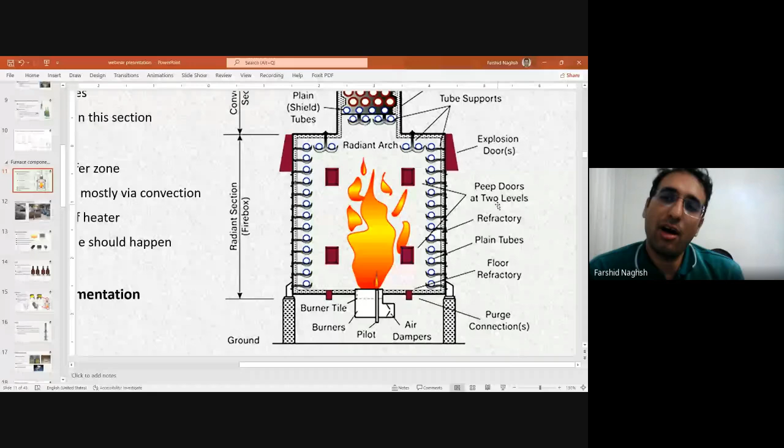Also up above, you see explosion doors. Explosion doors are required to keep the heater safe from a structural point of view, to keep the structural integrity of the heater when you have an explosion inside it. These explosion doors help the wave of explosion get out of the heater instead of directing it to the convection section. So they are necessary to be planted on the heater, and they are vendor catalog items, and they have some calculations. The explosion doors are bought from explosion door vendors, and if I remember correctly, for different duties, a minimum number is required, with minimum changes for different duty ranges as per API 560 to be placed on the heater. So these explosion doors help the safe operation of a heater.

My experience is that explosion doors are very hard to place on smaller heaters, because you have a lot of connections on the heaters around the upper portion of the radiant section, and also the size of the explosion doors are not finalized when you are in clarification with the vendor. So it takes a lot of space, and this causes the other instrument and process nozzles to go inside together and be very close to each other. All in all, explosion doors are required as per API 560 and help the safe operation of the heater.

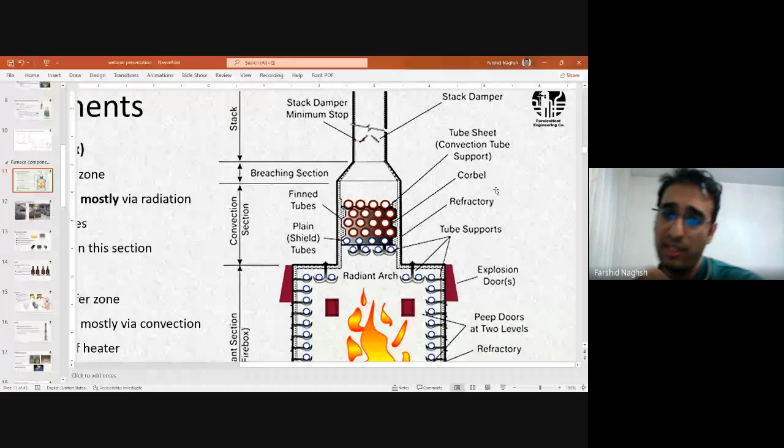In different sections, different sorts of supports are prepared for tubes. For example, in the convection section, based on the geometry of the tubes - in this heater, we have horizontal tubes which are perpendicular to the plane of your computer screen - you see we have two types of supports.

The above one looks like a spoon. For supporting the tubes which are on the wall, we need a spoon type of support, and for the tubes which are going slightly below the roof, you need this kind of hanger support.

These supports are not covered with refractory, so they need to have a high alloy metallurgy to be able to resist the high temperature. Most of them are manufactured using a casting process, and the metallurgy is selected based on the tables available in API 560. They are also high alloy metals, for example chrome nickel alloys, 50 chrome nickel alloys, and they are manufactured normally using casting technology. I will go through them a bit more on the next slides.

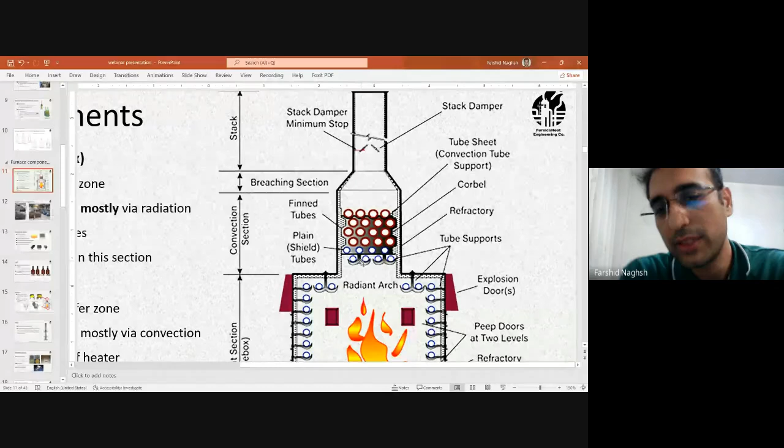Now let's talk about the tubes here. The tubes that are here directly see the flame, and we have requirements based on API. You see in this picture we have blue tubes here, and again blue tubes here. They are plain tubes, and these plain tubes should be used here as per API.

It means you have to have the same metallurgy for the tubes that are in the convection section but see the flame directly. How many rows of tubes? As per API 560, you need a minimum of 3 rows of shield tubes. They are called shield tubes or shock tubes.

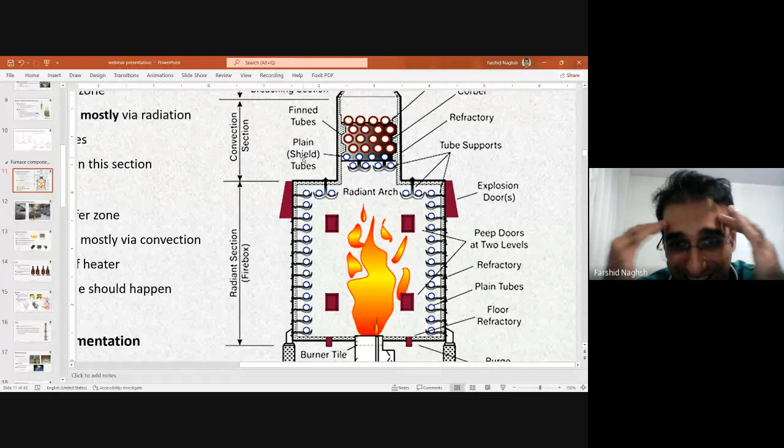Why are they called shield tubes or shock tubes? They are called so because they shield the upper tubes, which are fin tubes, from flame. In older designs, for example in 1960 or 1970, the designers used to put a refractory wall here to protect these tubes.

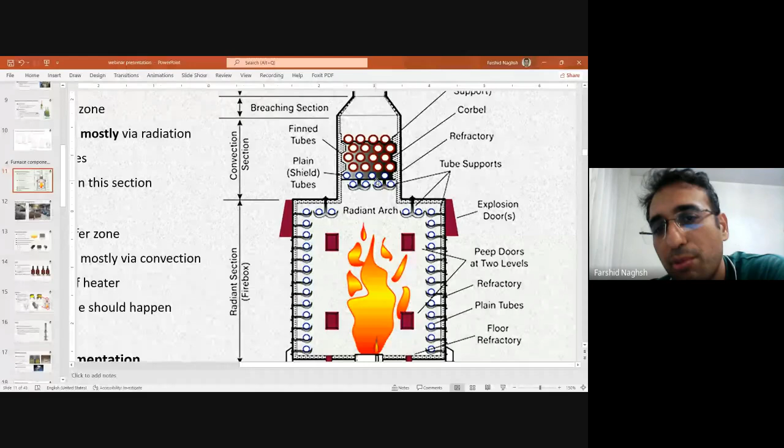The criteria, the philosophy, has changed with the advancement of metals and materials, and there is no need to put a refractory wall here. We use a higher, more resistant metallurgy for the tubes, minimum of 3 rows, and we call them shield tubes. These shield tubes protect the fin tubes from the high radiation of the flames.

And the interesting part is that you have a design theory for the tubes inside the radiant section. You also have the same design theory for these shield tubes, although they are in the convection section, and they are viewed as radiant tubes in calculations, although placed in the convection section.

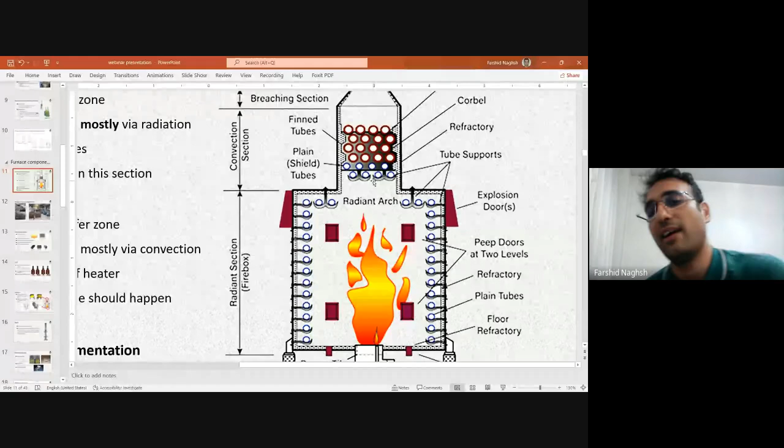Okay, we have shield tubes. As per API, we have to have a minimum of three rows of shield tubes with the same metallurgy as radiant tubes. Some of my colleagues sometimes tell me that we change the metallurgy, using lower metallurgy because they are installed higher above the flames. But as per API this is not allowed, and you have to have the same design criteria for the shield tubes and radiant tubes.

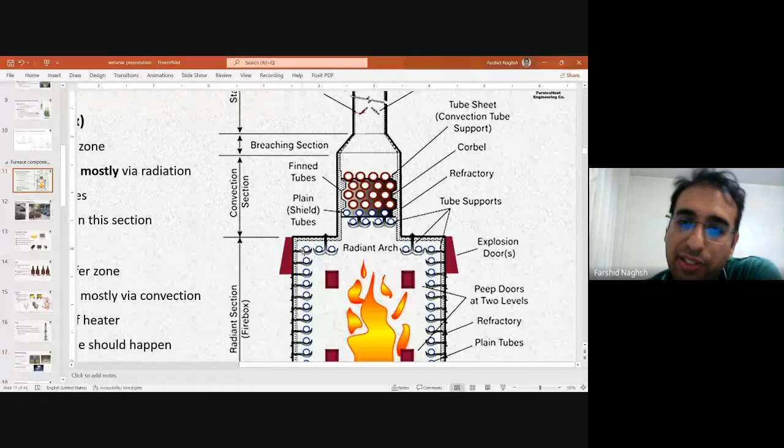Above the shield tubes, we have convection section fin tubes. I said minimum of 3 rows of shield tubes. There can be more shield tubes, and also after that we can have either fin tubes or we can again place bare tubes.

There is no limitation for us to use fin tubes or bare tubes, but it is logical to increase heat transfer by using fin tubes here. So we normally have fin tubes here, and keep in mind that the flue gas passing through the convection section, going from down to above toward the stack, reduces its temperature and loses energy.

So the tubes experience lower temperatures as you go higher up. If you have more sections of convection, more bundles of tubes, you can use lower metallurgy tubes because they are going to experience lower temperatures. It's not shown here, it is only one bundle of fin tubes.

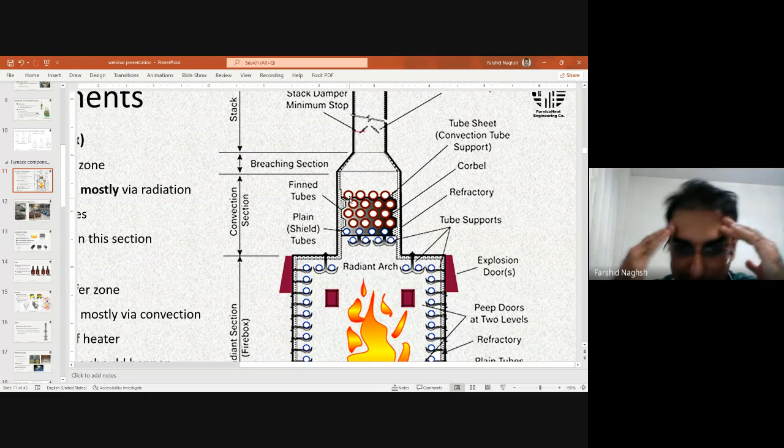It is normally forged or cast, manufactured of forged or cast material. It is manufactured of high metallurgy, high alloy metallurgy, and it has many mechanical problems.

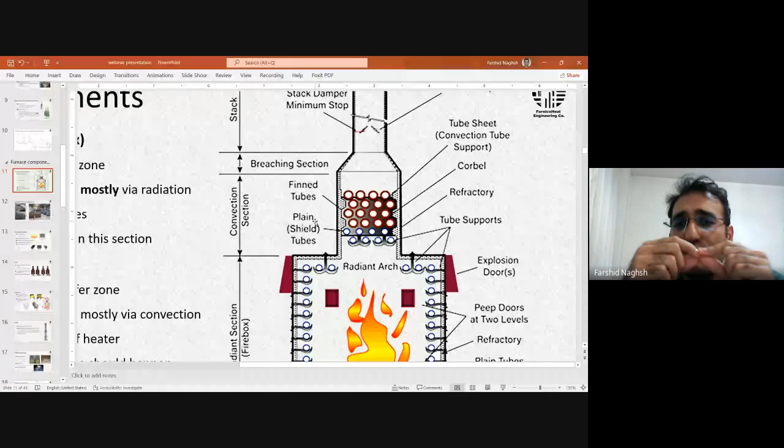The dominant failure mechanism is creep inside these tube sheets, and they have to be carefully designed and manufactured. We buy most of them from China, and they are very big and thick tube sheets, with tight tolerances. One big difference between these tube sheets and shell and tube tube sheets is that, because of the high temperature, the tubes are allowed to move freely inside the tube sheet and are not welded to it. They act as a weight support to keep the weight of the tube and process fluid, especially important at high temperatures where these movements matter a lot.

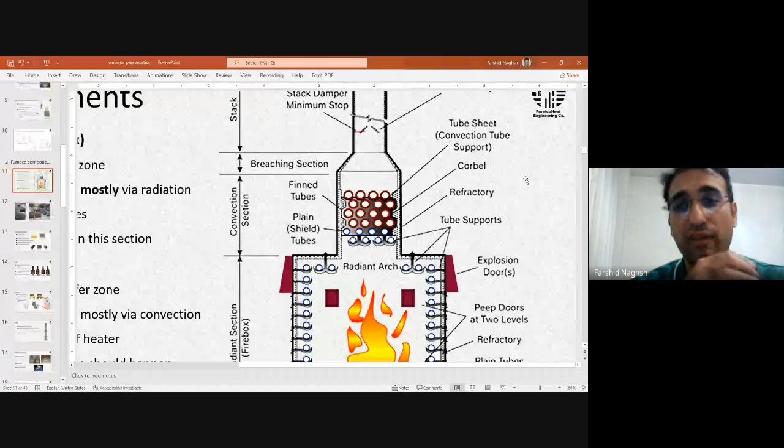Okay, so this was everything about the convection section. We'll talk more about tube sheets.

Okay, we need a breaching section. We need to change the geometry from a rectangular shape to a circular shape, so we need a breaching section. This breaching section sometimes makes a lot of operational problems for us. If I had time, I would go through the problems associated with it. After that, we have the stack, which helps the flue gas get out of the furnace, and we have a damper to control the pressure or draft inside the heater. We'll talk more about the pressure profile inside the heater later.

Okay. Very, very hard slide it was, and it has a lot of points to talk about. Okay.

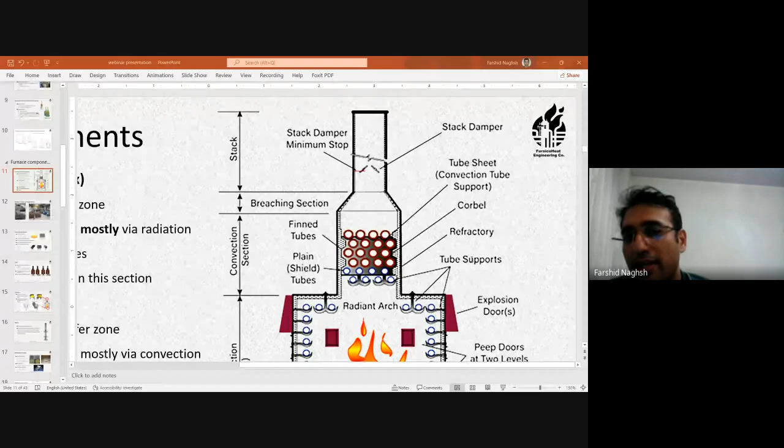Thank you, Mr. Akbari. Mr. Jafari, refractory means a layer inside the furnace - yes, we'll talk about refractory in the following slides. Yes, it is a layer of material, mostly alumina based, to keep the heat inside the furnace. Yeah, that's right, thank you very much.

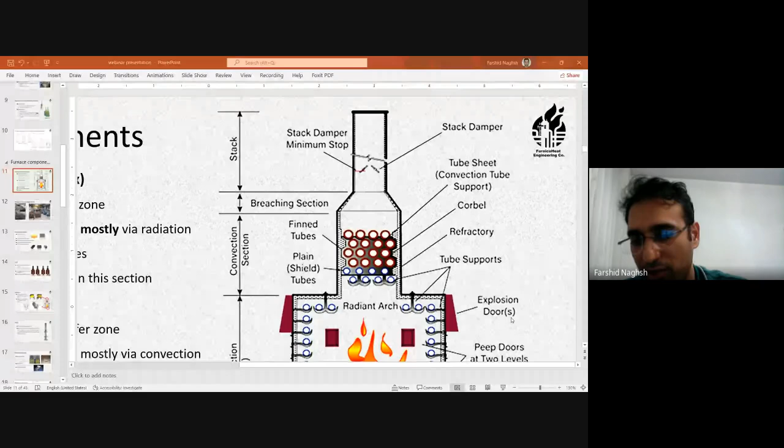API 936 describes inspection and installation, and the method to buy the monolithic refractories, and is a very good help. Yes, as per API 560, if you use castable for your furnace, you have to follow API 936. This is mandatory, so we need to use API 936. Yes, I'll talk about it in the following slides. Thank you, Mr. Akbari. Okay.

We talked about the configurations of the heater. We talked about different components. Now let's see real-world examples of the tube arrangement in the radiant section.

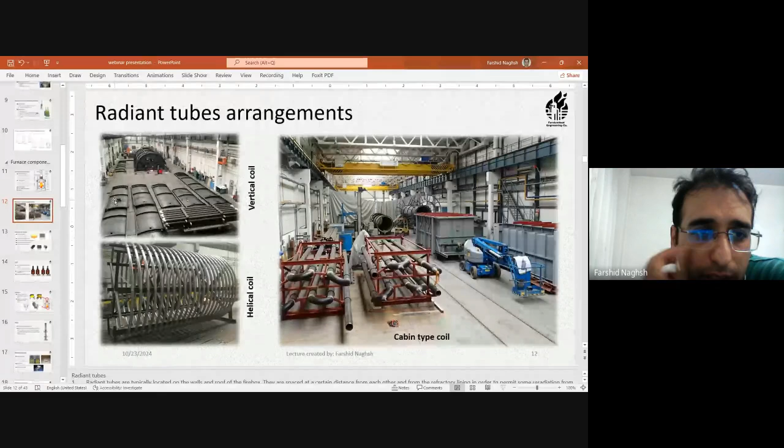And you see here the coils that would be assembled together, vertical. You see the coils here, and also these doors on the modules - they are the inspection doors, I guess. Anything else I see here?

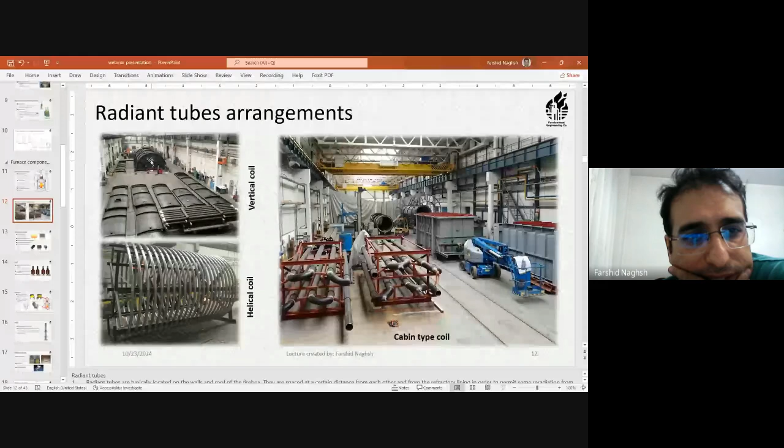You see the bottom, I think it's very small, but from a mechanical and structural point of view, you see that the body of the heater is stiffened using stiffeners. Also, I guess the bottom of the heater is also being stiffened by the stiffeners.

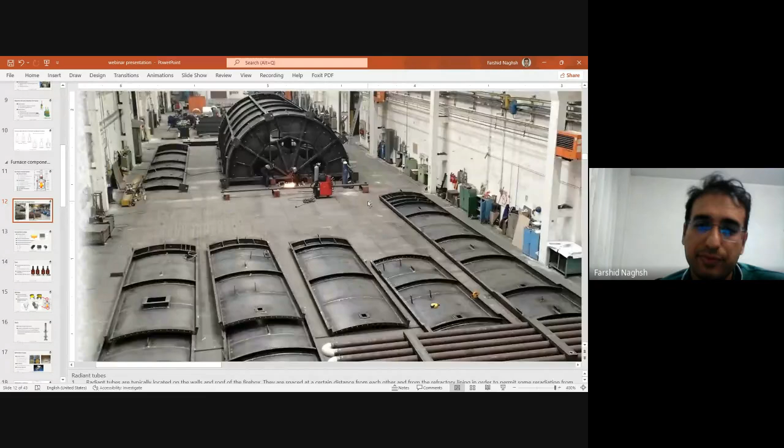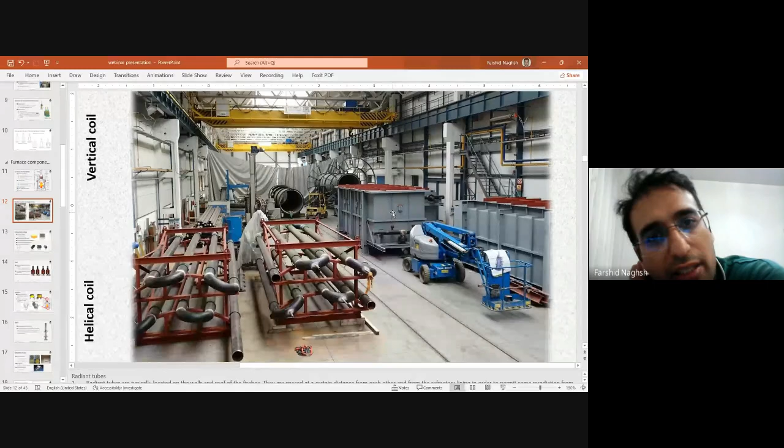Also, they were all cylindrical type. You can also see the box type heaters - see, these are the boxes, and these are the coils that will be installed inside the boxes.

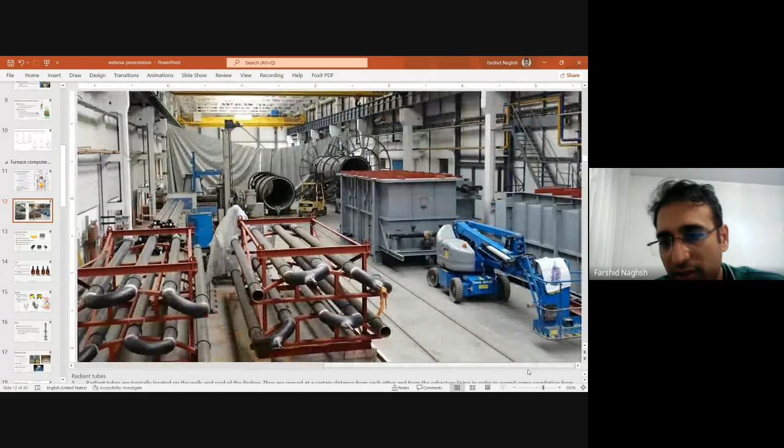I guess by the looks of it, they are fabricated as modular. They will be shipped to the client's site and installed on each other, before every section - first the coils are installed, then the other section comes on top.

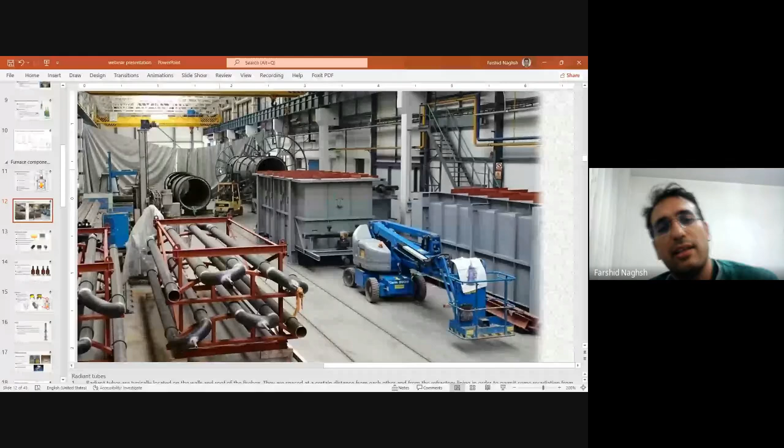Also, you can see a smaller vertical cylindrical - no, this is a stack, I guess. Probably the stack of the heaters. The platform here shows that it is a stack, not a radiant section. Okay.

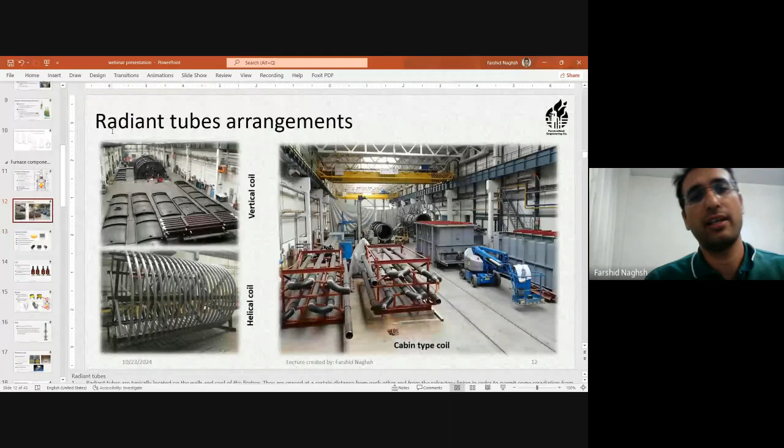Now that we have talked about radiant tubes arrangement, let's talk a little bit about convection tubes. I went through them mostly, but it's not a bad idea to review that. This is the convection section.

In simple heaters, configurations may change based on the radiant section, but the tubes in the convection section are always horizontal, because the economizer or convection section is installed on top of the radiant section. There is no other arrangement logically possible, so the tubes are horizontal. If you make the tubes vertical, some other things might happen.

The flue gas comes from below and exits from above, passing over the bare tubes and fin tubes. See that we have 3 rows of bare tubes, and the other tubes are fin tubes. We'll talk about the number of passes in later slides.

Tubes are installed horizontal and can be shared between multiple fireboxes. Yes, there are some licenses that employ, for example, 2 radiant sections that come and merge into one convection section.

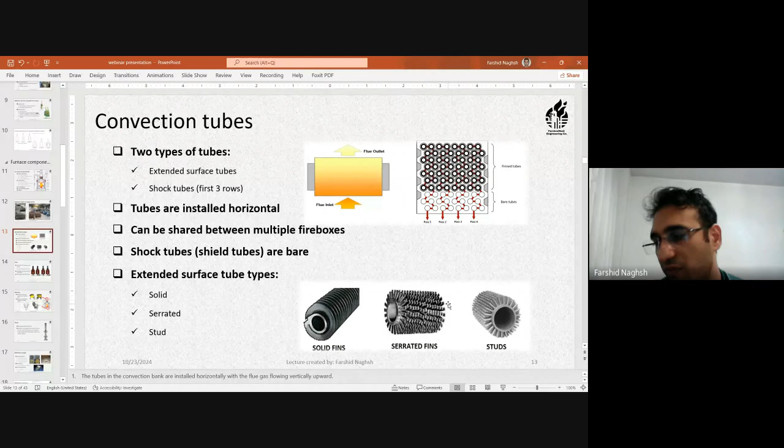So it depends on the process, it depends on the fuel, to choose what sort of fins you use. Obviously, the type of fin should be considered in the thermal design of the convection section.

We will talk more about the design of those sections in later slides, but for now I'll skip and go to other components of a fired heater package. A fired heater package, from a pressure point of view, from a draft point of view, can be divided into 2 major subsections: the first is natural draft heaters, and the second is mechanical draft heaters.

What are natural draft heaters? You see it as the first heater on the left. A natural draft heater is designed in a way that the flue gas itself, with the help of the temperature provided by the burner and the stack effect, can get out of the heater. It can transfer its heat to the surrounding tubes and get out of the heater.

The job of a heater designer, a thermal designer, is to make sure that in a natural draft heater, the flue gas in different scenarios of operation is able to get out of the heater. You may ask, is it possible that a hot flue gas would not exit the heater? Yes, it is possible. For example, see here, you have a convection section.

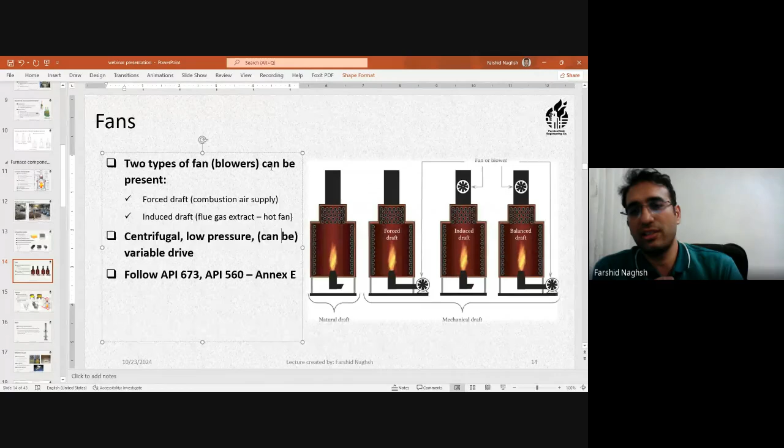Now, I forgot to talk about a very important word: draft. What does draft mean? As per API definitions, draft means negative pressure. So when I say I need a draft inside my heater, it means negative relative pressure in comparison to the atmospheric pressure. Draft means negative pressure.

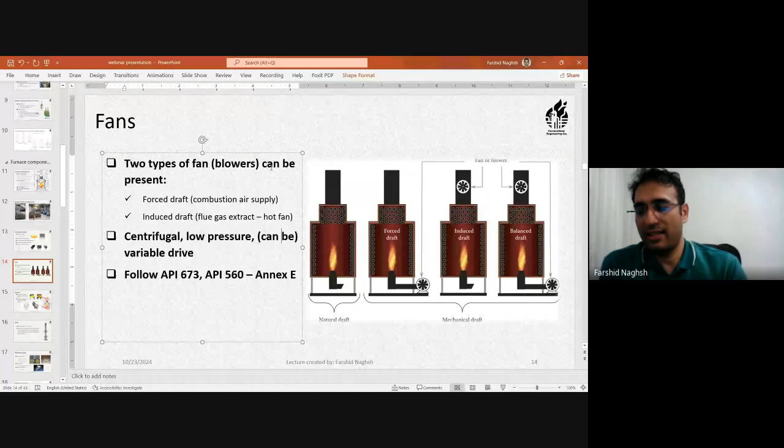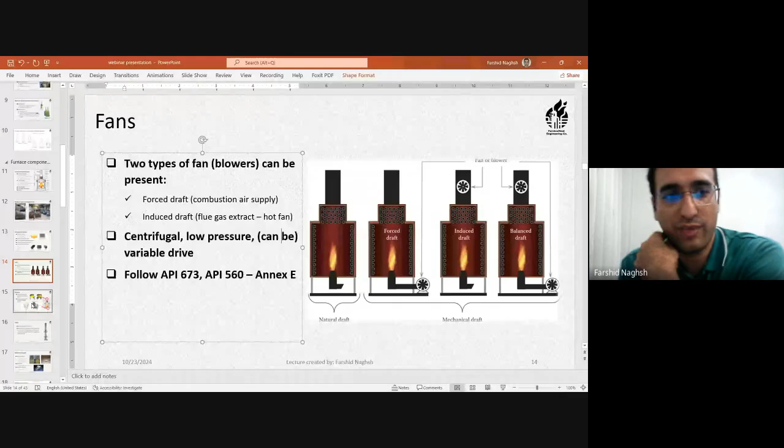An important point is that inside a heater, you are not allowed to have a positive pressure. A very well-designed heater cannot have positive pressure. Okay, let's move on, I think we are losing track of time. I have to be a little bit faster.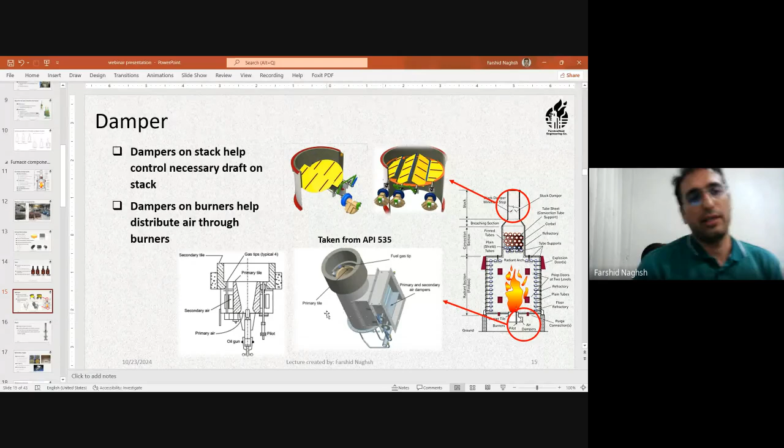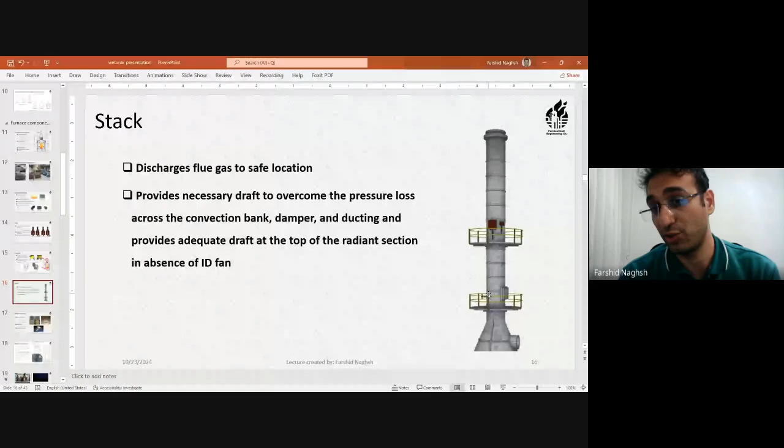The last part is the stack which we talked about. Take a look at these platforms. They are very important from a mechanical point of view and also an operational point of view. You need a platform to let the operator take samples of the flue gas inside the stack. There are some requirements inside API 560 and ASME STS1 for these platforms, the place they should be located, and the height at which they should be installed on the stack.

Now let's go to refractory. We have three major types of refractory as per API classification. API classifies refractory into three major categories. The first are refractories that have one shape: they are monolithic, further categorized as hydraulically bonded castables, chemically bonded castables, and chemically bonded plastics.

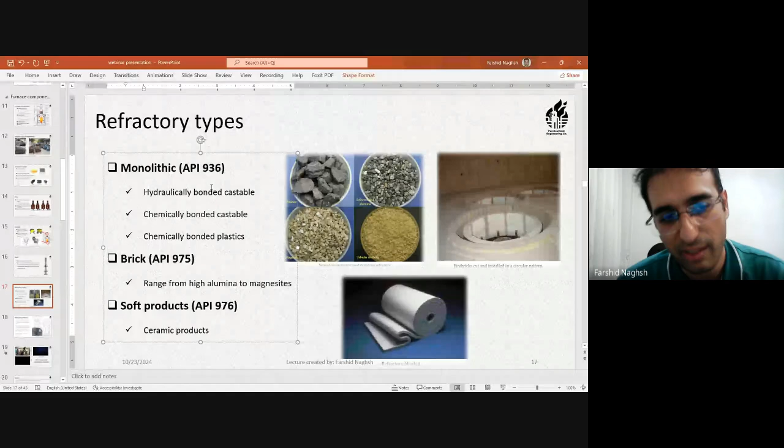You can read a lot about these three types in API 936. They are monolithic refractories; you can see the shapes here. They are sometimes mixed with water, or there are some methods to prepare and apply them. They are monolithic refractories, having one shape, and we will see some videos of them in following slides. Also, we have brick refractories as per API 975.

You have seen them in the bakery near your house probably. These are fire bricks, and they may have different compositions. I'm not going through the compositions that are required, but they are in form of brick. They are harder to install, but they are much more resistant to creep cracks inside the furnace.

Also we have soft products which are mainly based on ceramic products. You see one blanket here - this is a ceramic blanket that is used in certain places. For example, soft products are used in clean flue gases on the top layer of the refractory. Sometimes they are used when high temperature tube sheets in heat exchangers are needed.

So soft products are based on ceramics, and they have their own application and their regulations. API 560 has talked a lot about this - a big part of the API is about the usage and how to install these kinds of refractories.

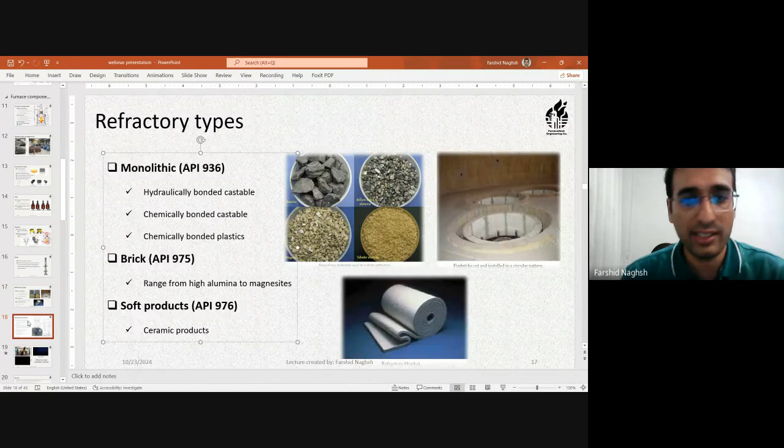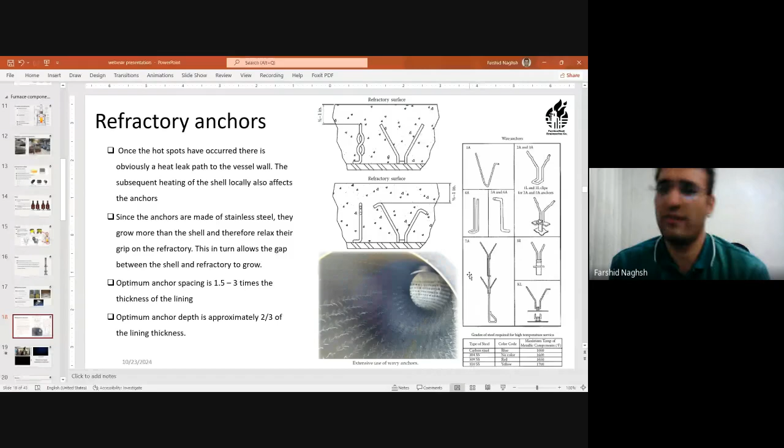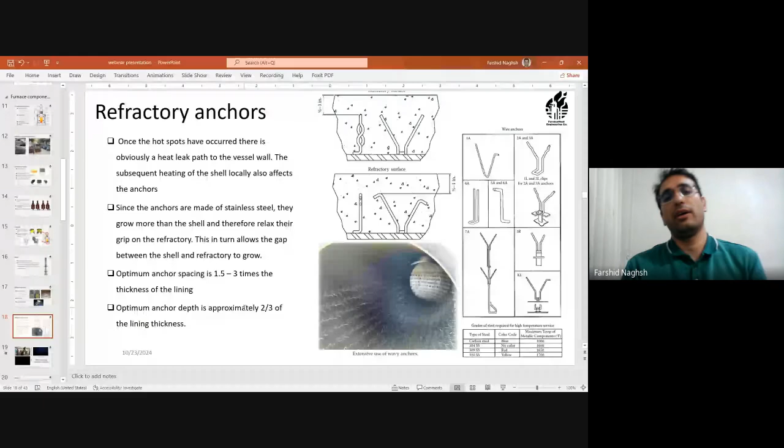These refractories need something to keep them and hold them in place. They are called refractory anchors. They have different shapes - this is wavy, this is V-type, and you have different types. Their material is mostly stainless steel. I have worked with Inconel anchors, and they keep them in place. The anchor spacing and the depth of the anchor requirements are very well told inside API 560.

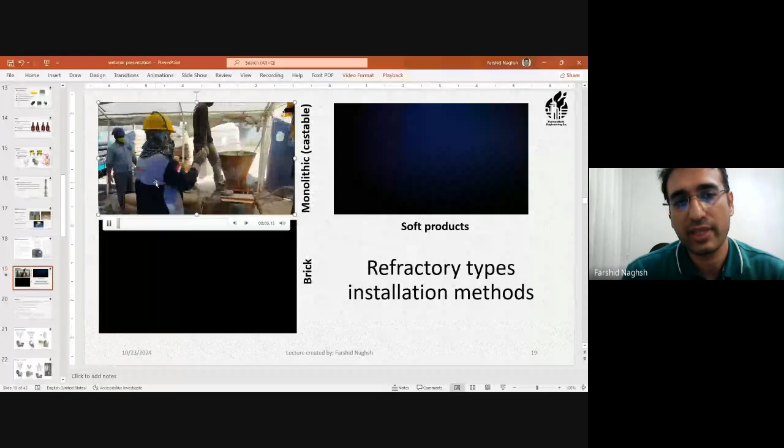Let's see these three mini movies on applying refractories. This is the gunning mechanism, a gunning method. This is like shotcrete for applying concrete in building structures or houses.

This is a castable. This is applied on the surface, the internal surface of a vessel, and you see safety is very important here. People have to wear masks and be careful about their safety. This is one method of using monolithic castable refractories.

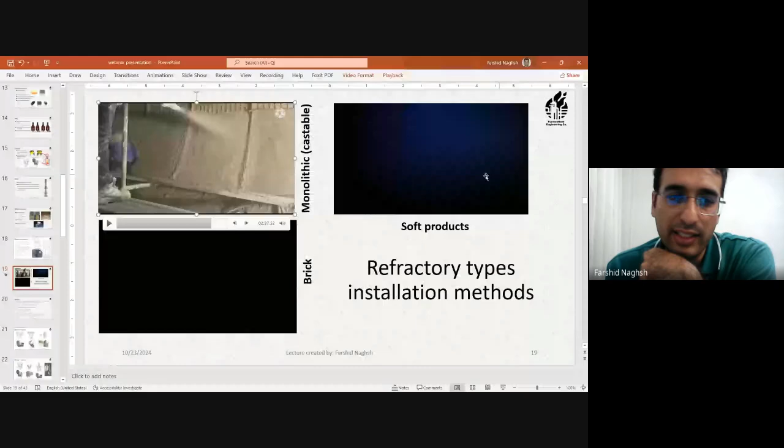The other one is, I think, inside the boiler. Yes, this is a boiler - the folks are applying fire brick refractories using mortars. This is another kind of refractory, and it has its own limitations.

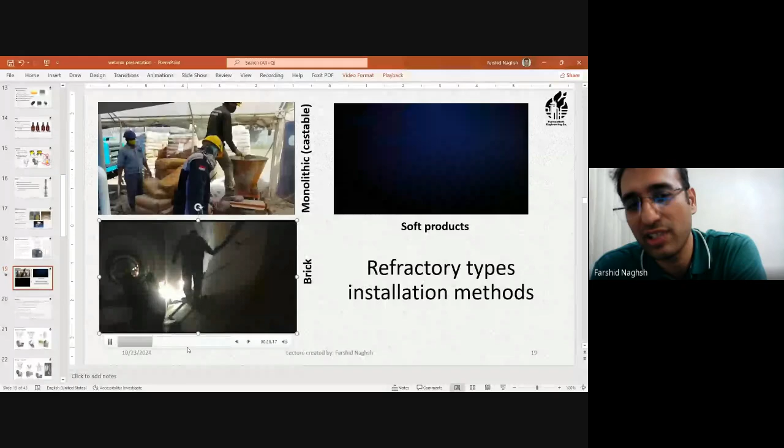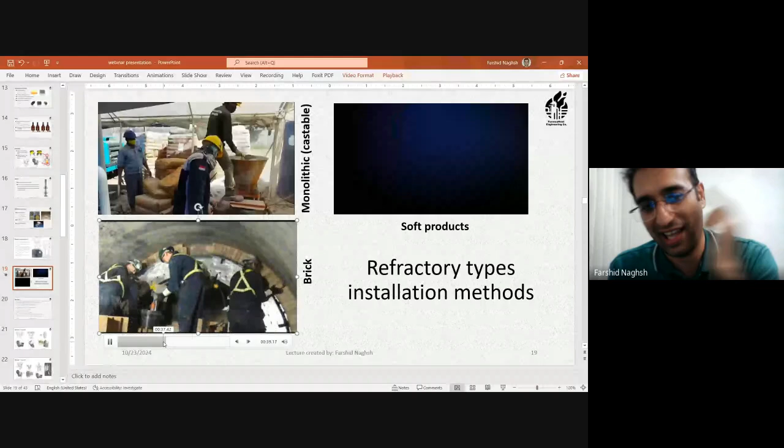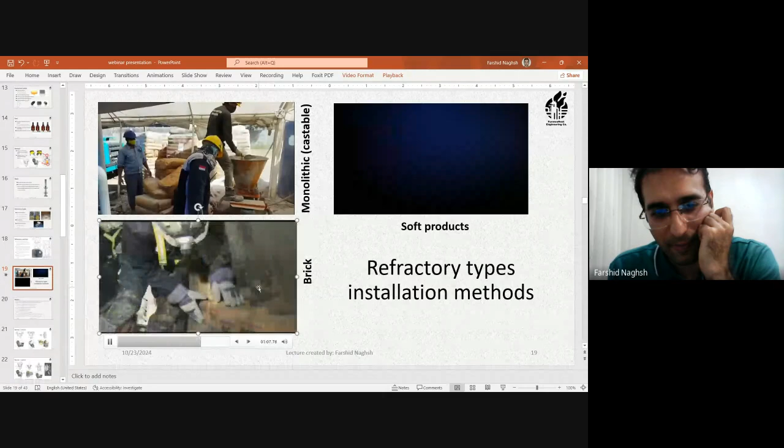Bricks - the problem with bricks is that they cannot be used in exotic shapes. So you have to have a very uniform shape to be able to use this fire brick. They cannot be cut at site; they have to be prepared and shipped and then applied. These are fire bricks - you see that they are being very careful with it, and you can check more on that in API 560 and API 975.

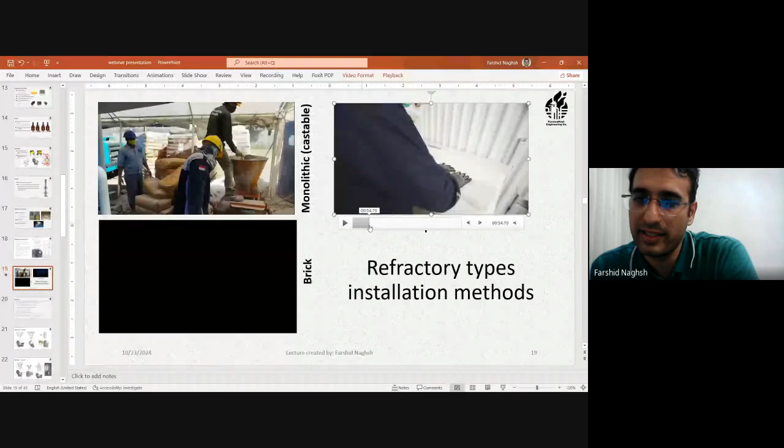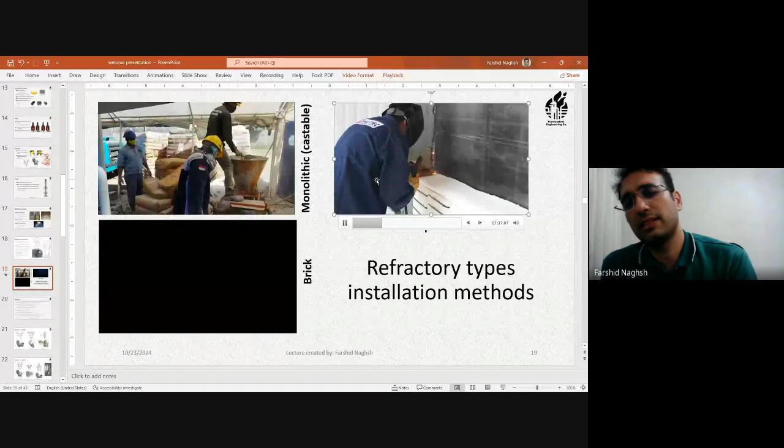And also the last one, we have block modules installation. We have soft products - see the ceramic blankets are formed like a block. They are built and formed like a block. The anchors are welded to the surface to ensure correct restraint, and the ceramic block modules are inserted on the H-type anchors. The operation is repeated by installing more H-type anchors as necessary to complete the row on which you are working.

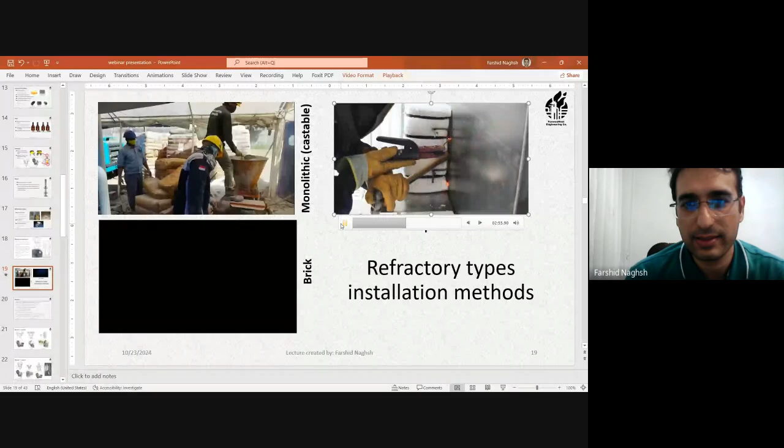You can see more on that on YouTube if you are interested.

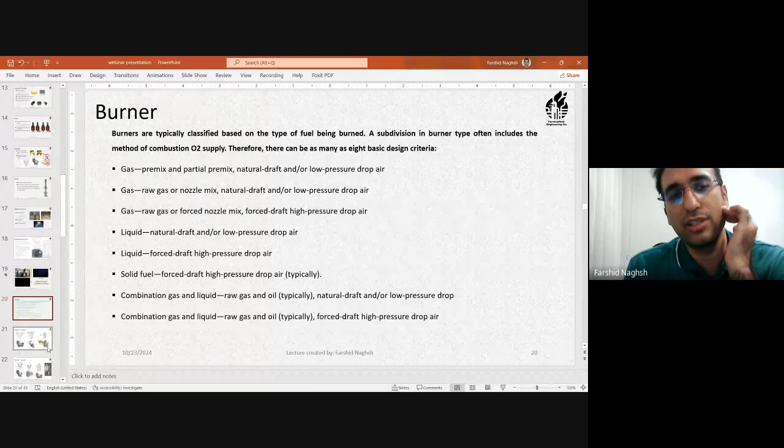We talked about burners. I don't want to continue, but you see API 535 has divided burners into different categories - I have taken these figures from API 535. The first one and most famous is the raw gas burner. In raw gas burners, the fuel and air meet at the gun point, at the combustion point; they are not mixed prior to the throat. In the second figure, premix gas burners are burners that are partially mixed together before reaching the throat of the burner to have good combustion.

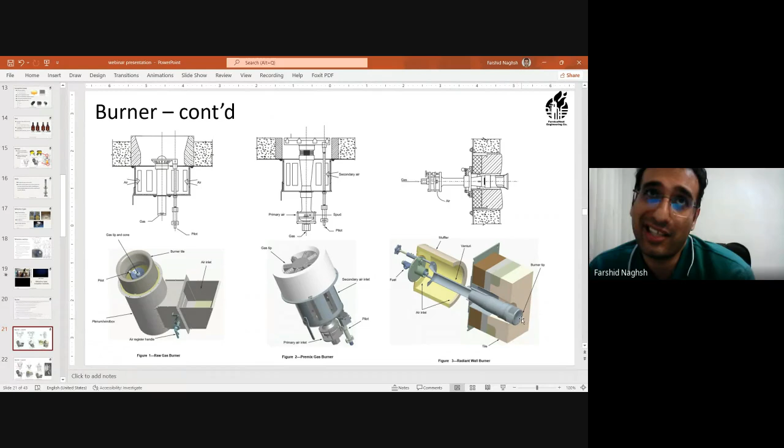The third one is a radiant wall burner. I've worked with radiant wall burners in Topsoe methanol plants in steam reformers. This is most important - they have smaller flames, and the mechanism of heat transfer is mostly via radiation, increasing the temperature of the refractory by radiation mechanism. You can also check other kinds of burners in API 535.

Okay, let's have a break. We have a few more slides about design considerations that we will discuss in our next section. Thank you.